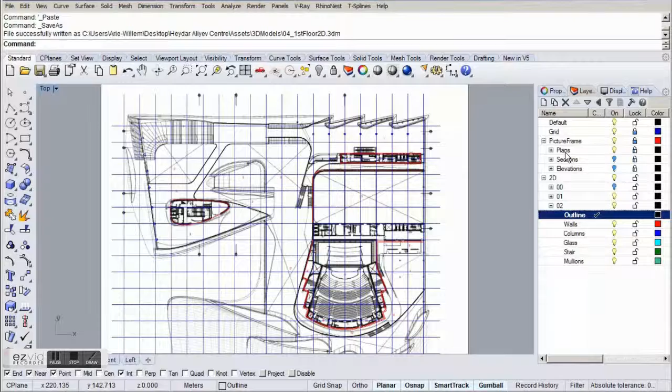Let's start again from the top left corner and work our way clockwise until we reach our initial start point again. Use the grid and smart track for the zigzag part in the beginning.

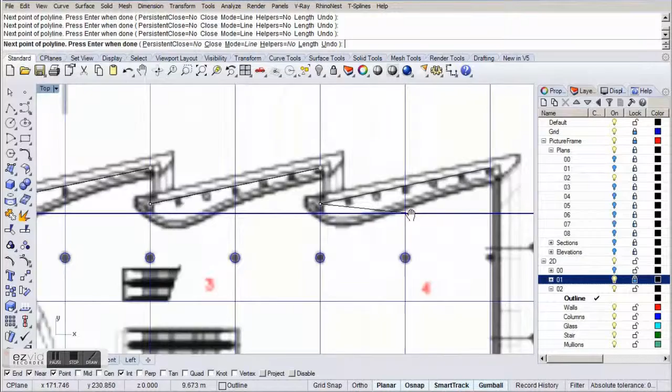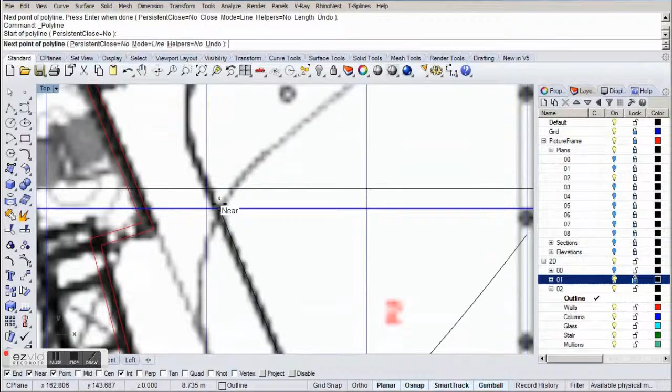After the kink, stop your line a little short of the corner. We'll use a fillet again here. Let's draw a small line piece here and start it a little short of both ends where the curvilinear part starts. Let's use a fillet of 5 meters here and make sure join is set to yes from the options.

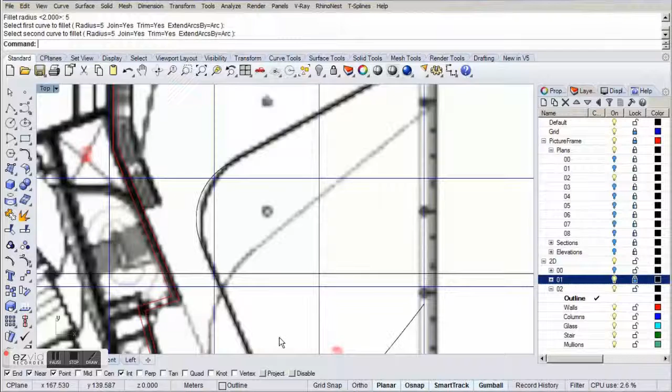Alright, for the bottom curvy part, let's draw again a control point curve and use the outline from the previous level to guide us.

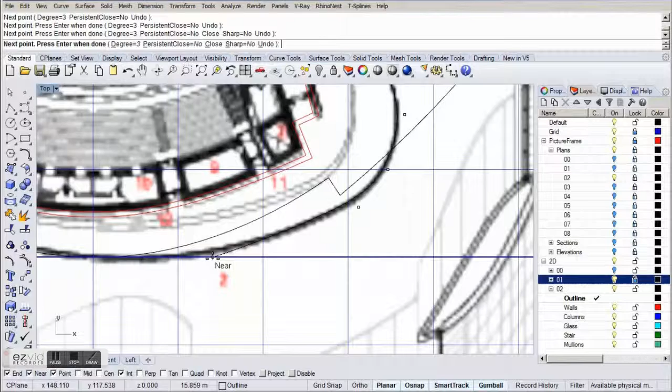Let's stop it again where the straight part starts. Now for the straight part, use the outline from the first level and simply follow it.

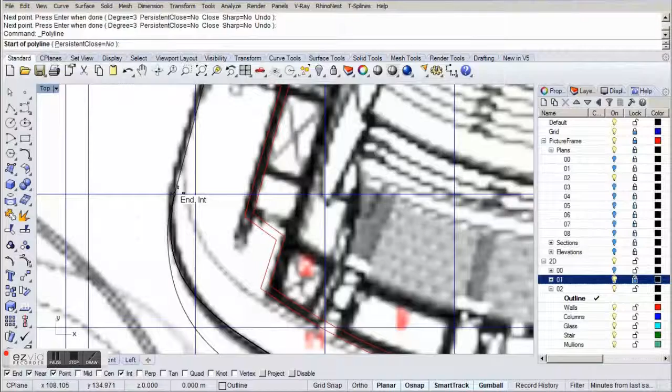Stop a little shy of the point where it bends out. We'll use a fillet again here. So let's draw a small line piece here and stop it again a little short of the next corner.

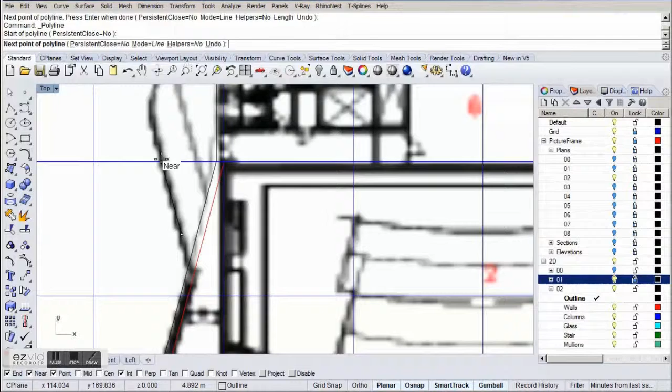So next line piece, start a polyline a little off the corner and continue along the wall from the first floor, stopping it again a little shy of the corner.

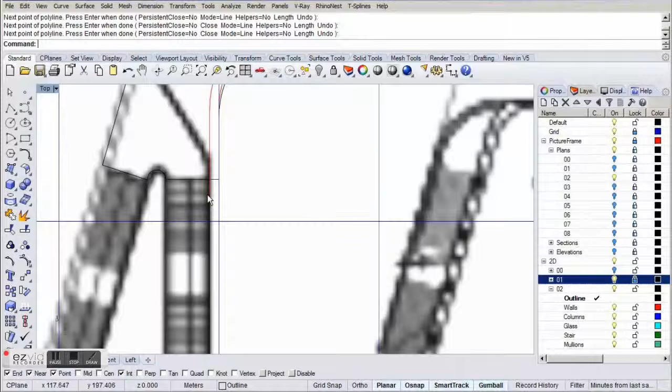Now draw that little line piece between the corners that bulges out. Draw a line piece on the outline from the first floor using the near snap.

The length doesn't matter. We'll use fillets for all these line pieces we just drew to connect them into one single curve. One line piece missing.

Let's use our initial start point to start our line and use the picture frame to trace over the outline.

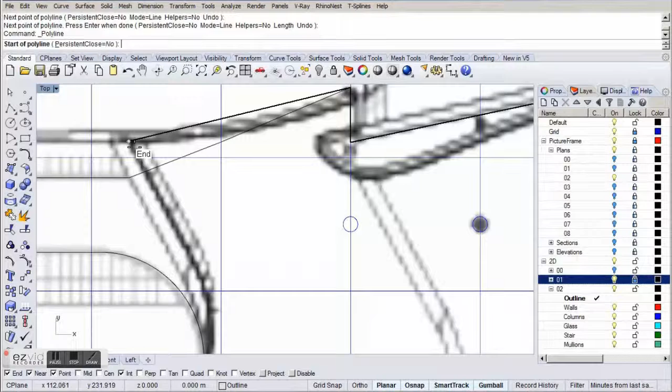Alright, the only thing missing is using fillets to connect all the pieces. It's a little bit of trial and error finding the right radius as they're all different. If you mess up, simply hit Ctrl Z and try a different radius. It's quite fast.

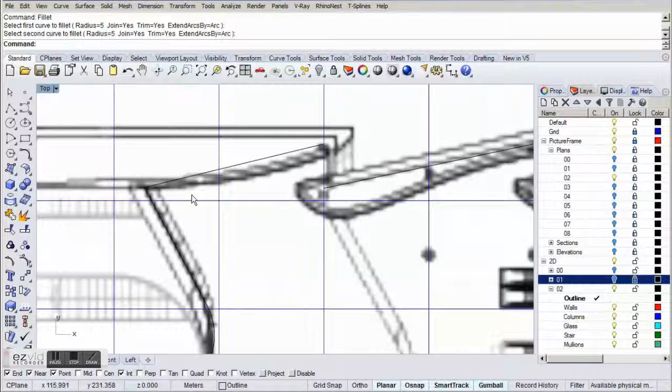Now finally, let's make sure it is a closed curve. If not, simply join the line pieces together.

Cool, so there's this floor outline on the left that's missing. Let's start at the top left again and work our way clockwise until we close the shape. So the first part is a simple line piece.

We can use a polyline for this one. Use the first floor outline to find your start point.

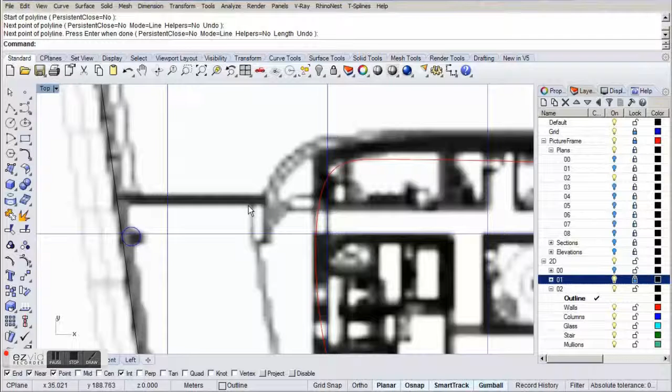For the next part, let's use a control point curve. We can simply trace over the picture frame here until we reach the bottom.

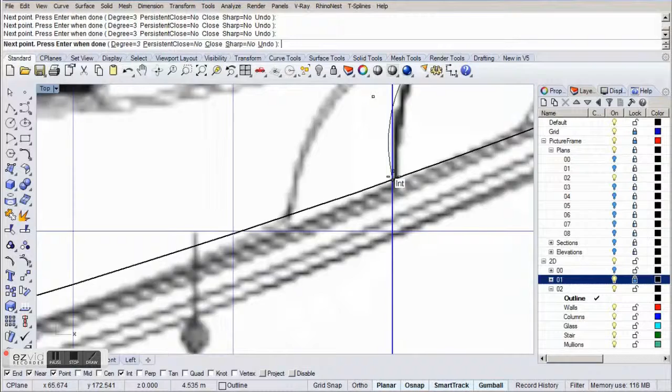From here onwards, let's start another control point curve, and use the floor outline from the first floor to find the extension of the floor outline using Smart Track to find the endpoint.

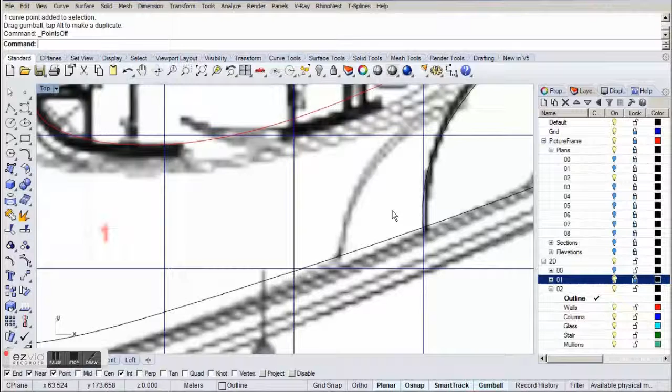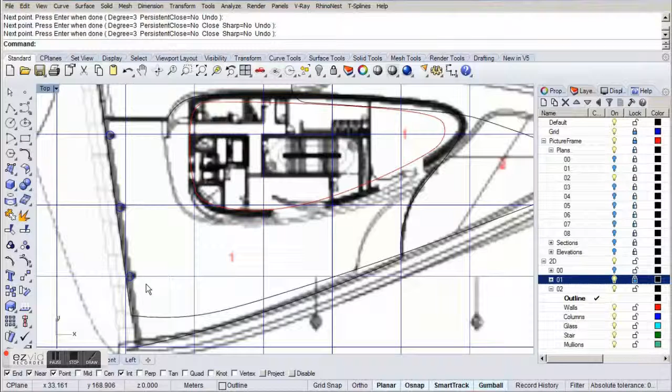Now just one line piece missing. Simply start this line piece from the end of the line we just drew and end it at the point we started.

One thing missing, and that's joining the line piece together into one closed curve. Alright, those were the outlines.

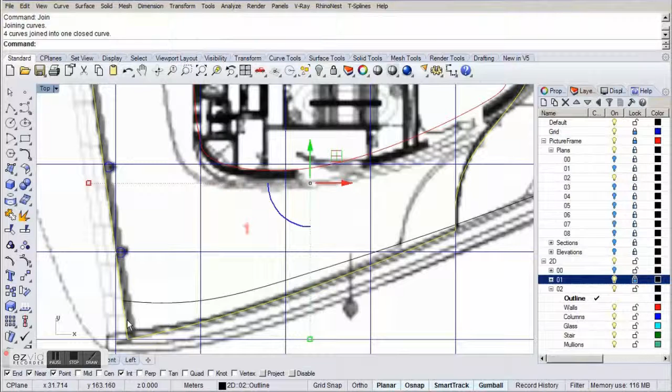Let's continue with the walls, and let's use the same method as we used before by copying the walls from the previous floor and modifying those. Let's make our wall layer the current one, and select the walls from the first floor.

When you've selected all of them, go to the walls layer, make it the current one, right click and select Copy Objects to Layer.

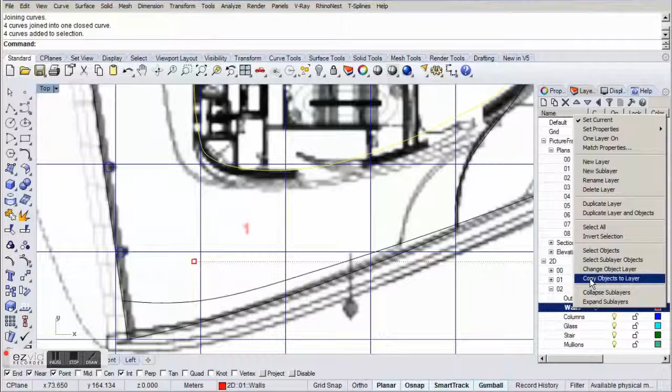Great, let's start with the core on the top. The core is a little bigger than the floor below, but there are some walls that overlap. We can use those. Let's delete the inner line, and split up the right line piece using the Split with Point option.

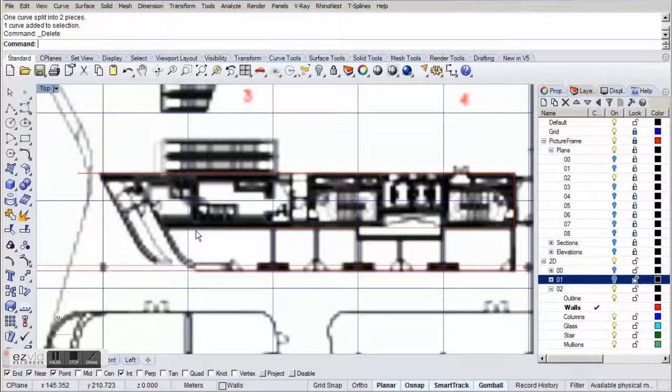Delete the line as you won't be needing it. Let's turn its control points on and adjust it using the underlying picture frame.

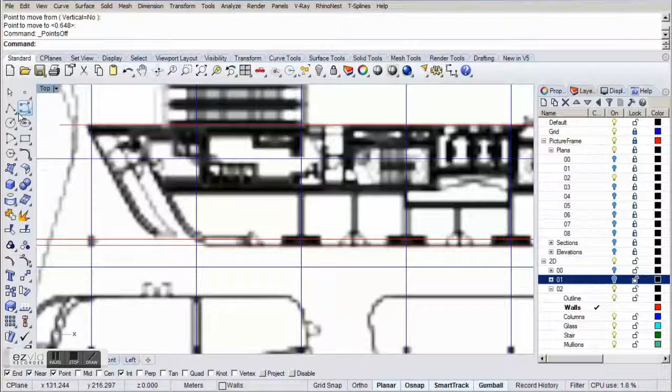The only line we need to draw is the curved end on one side. Let's draw a simple polyline and use the blend curve command for a change to draw the curved part.

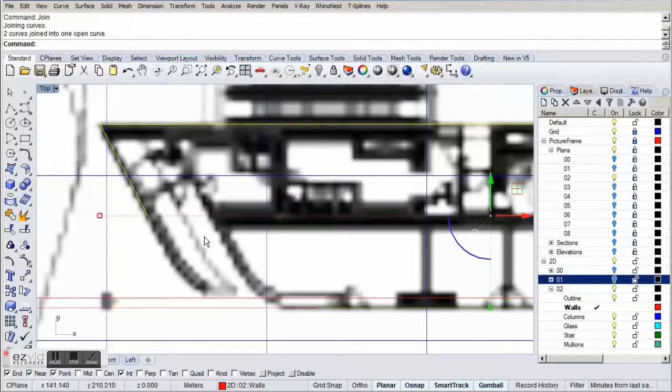Let's pick tangency for both ends in the option window and adjust the control handles to get the shape right.

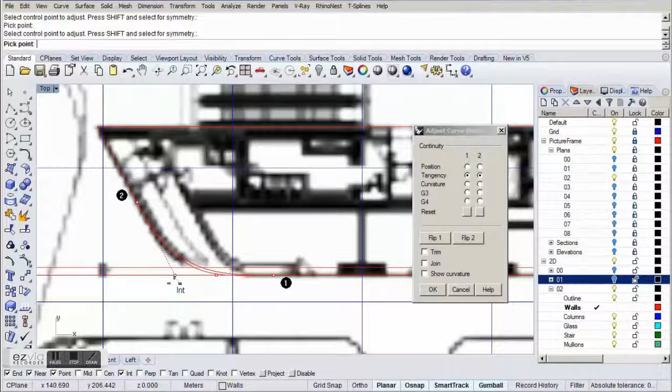The only thing missing is joining the lines together and offsetting them. Let's use 50 centimeters again as the offset distance.

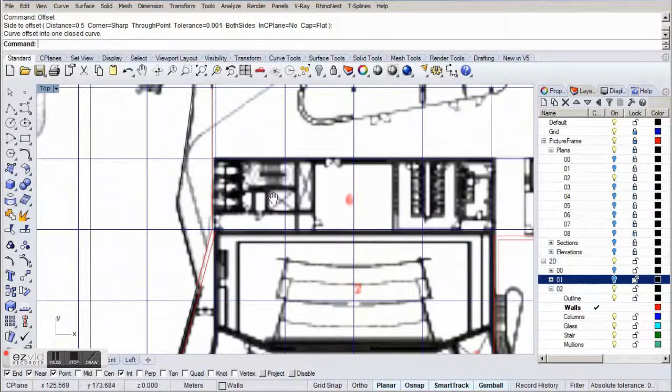Alright, let's focus on the wall from the auditorium. Let's split it in two parts and delete the part we don't need using the split command with the point option. Split the line on the outside and use the grid intersection for splitting on the left side.

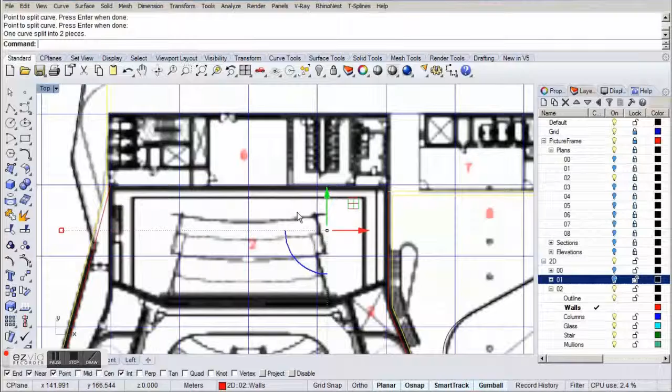Let's draw a small horizontal line on the grid axis.

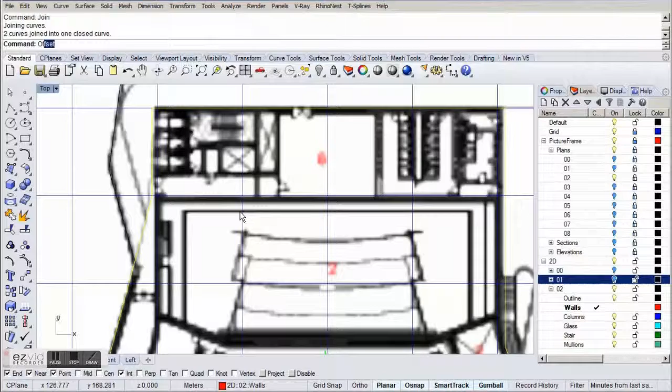Now let's draw the walls of the core next to the auditorium. We can use a simple rectangle for this one. Simply trace over the picture frame and use the grid line to snap to.

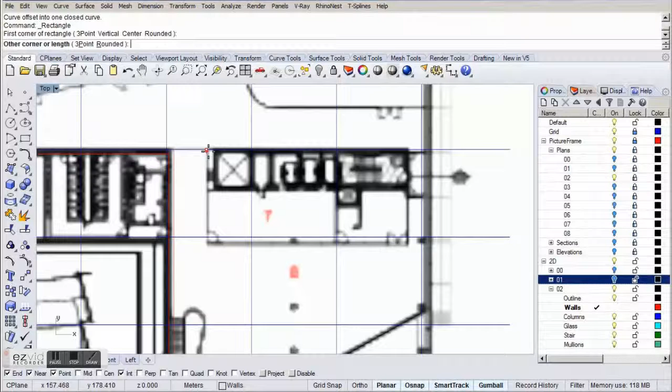The only thing missing is to offset both lines using 50 cm as the distance.

Alright cool, only one outline missing, and that is the one on the left. We can use our floor outline for this one partially. Let's select the floor line and copy it to the walls layer.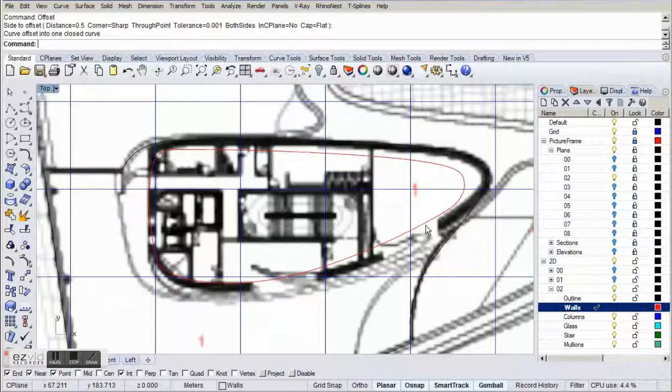Now let's split it on both sides using the picture frame for the position and the split command again.

There is a command called continue curve, which allows you to continue an existing curve from one end you choose. This will save us the step of later joining the two curves together, and it also prevents us from having a kink if we would have drawn a new control point curve.

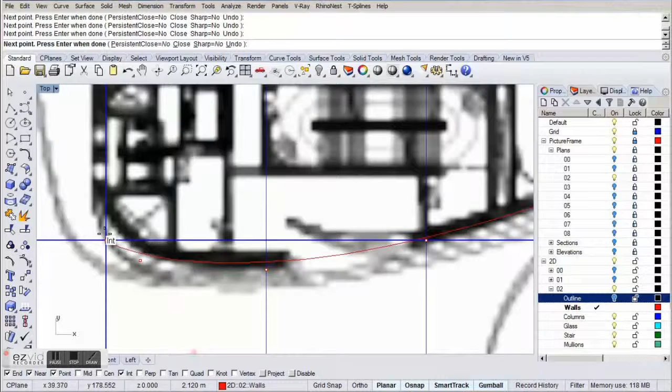Let's continue drawing the columns. We can simply copy them over from the previous floor.

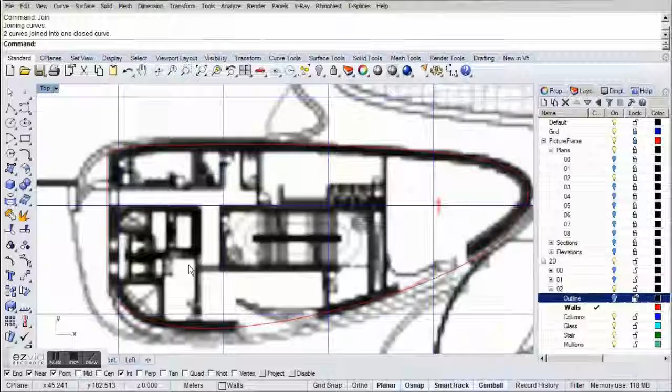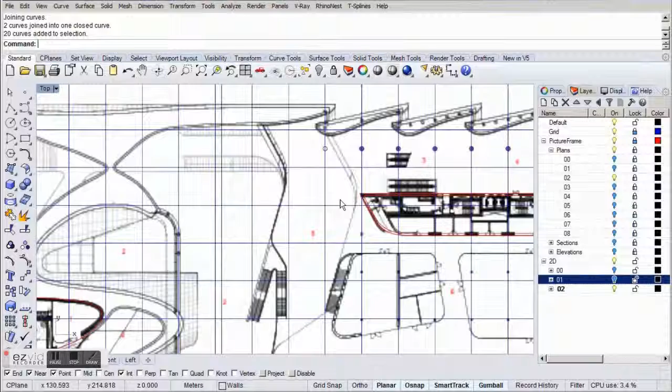We can delete this column as it doesn't support a floor. The floor tapers up at this point, as we will see later on.

Let's select this row of columns and copy it down, as it appears there are two rows of columns there according to the picture frame.

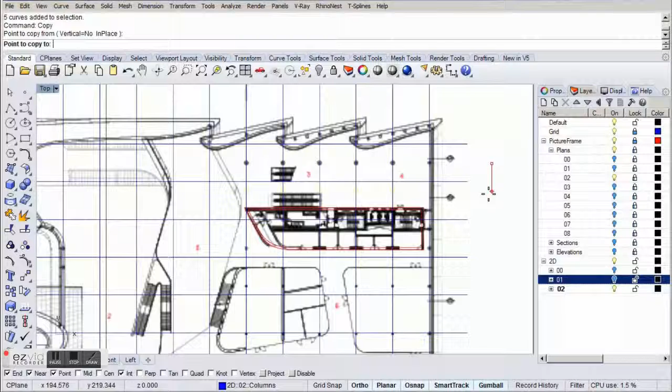So the rest of the floors are basically drawn the same way using the techniques we've been using. They're included in a 3D model that belongs to this chapter.

Let's continue in the next chapter by moving the 2D lines to the right height using the picture frame sections.